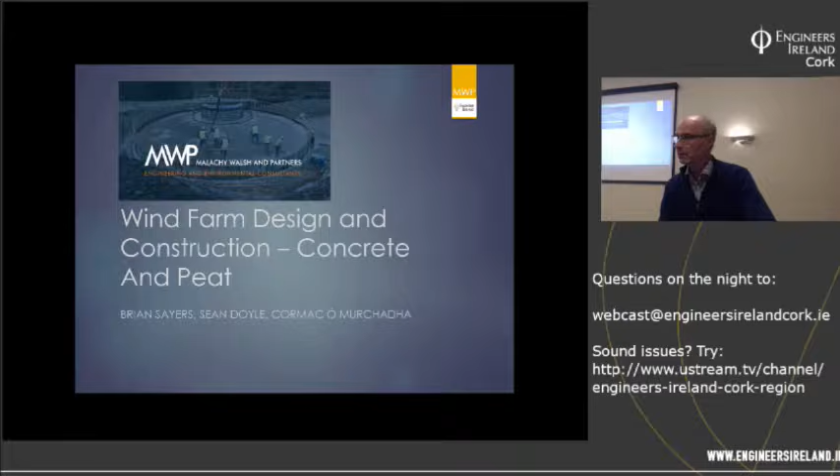Good evening, and thank you all for coming. My name is Brian Sayers, and I'm joined by Sean Doyle and Cormac Ó Murchadha. I'm from Malachy Walsh and Partners' Limerick office, and Cormac and Sean are from our Tralee office.

Malachy Walsh and Partners started in wind farm design about 13 years ago. Since then, we've been involved in approximately 500 renewable energy projects, covering everything from wind farm construction to pump storage, some solar farms, tidal barrages, and things like that. In the last 5 years, we've had an involvement in about 50% of all wind farms built in Ireland, and we've designed wind turbine foundations on 4 different continents.

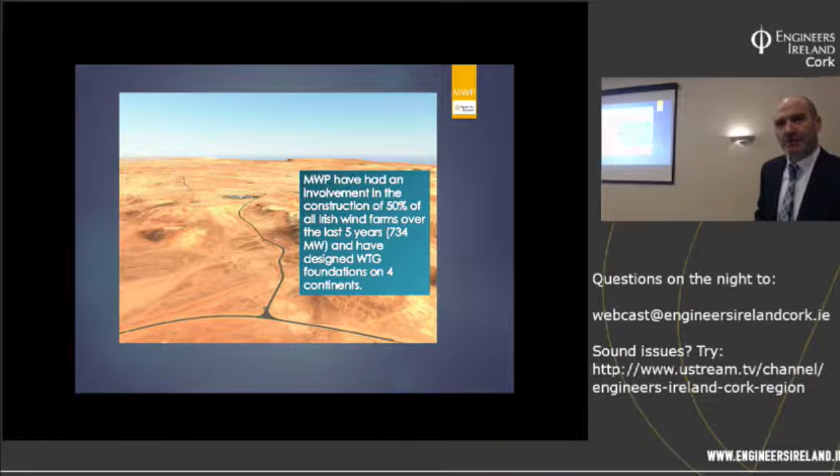We were hoping to make it 5. This project you see here was a submission we did with Enercon, the wind turbine manufacturer, for the first wind farm in Saudi Arabia, believe it or not. But it didn't go anywhere in the end.

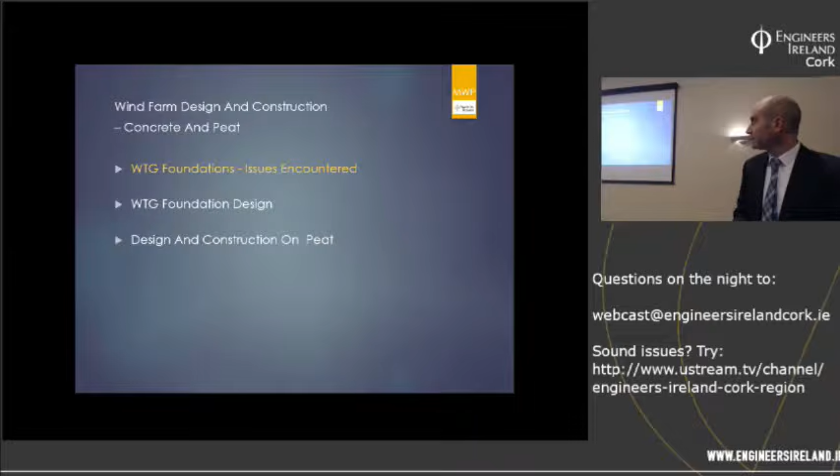So the title of our presentation tonight is Windfarm Design and Construction, Concrete and Peat. We chose to talk about concrete and peat because we found over the years that the majority of problems we've come across during wind farm design and construction have been related to one of these two. So I'm going to talk a little bit about wind turbine foundations and issues we've encountered during the design and construction of the foundations.

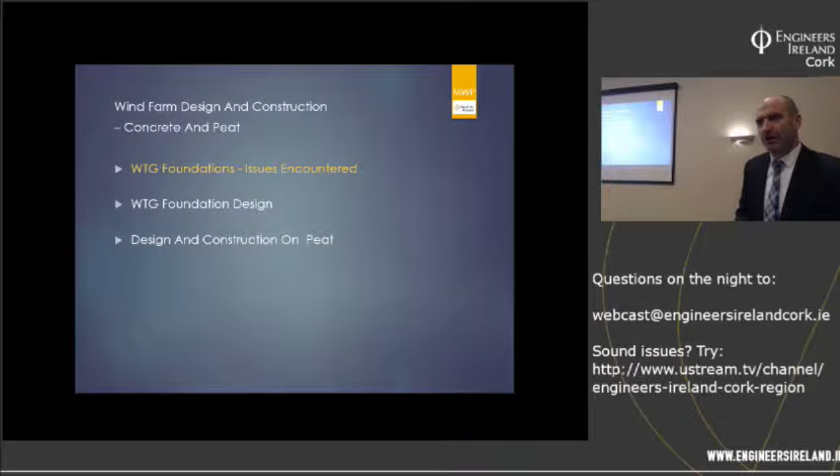I'm not going to bore you by going through the Eurocodes line by line - that's something Sean has planned for you. But try and stay awake, because Cormac has some very good stuff on peat at the end.

Just before we start, could we see how many people here have had some involvement in the actual design of a wind turbine foundation? Show of hands. So very few - 5, I believe, and Sean says 6.

So for people who haven't gone through that design process, it can be difficult to have a feel for the kind of forces and moments involved. The first time you get a wind turbine manufacturer's loading document and you open it up and you see the applied bending moment, it's a magnitude that's really quite amazing. I suppose it's a magnitude that nobody really comes across in other areas of engineering in their entire career. It would be very unlikely that you would come across similar kind of forces in the kind of bridges or buildings that we would be involved in here in Ireland.

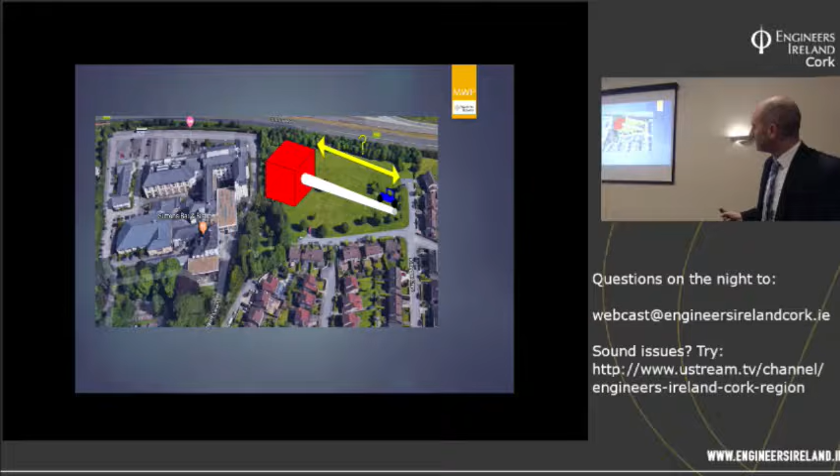So just to try and explain the magnitude of these moments involved in a more straightforward way, I've set up this kind of theoretical question. Imagine that we're here in the hotel in Rochestown, and in the field next door we build this gigantic block of concrete. We stick a wind turbine tower into the side of it, and we stick a little car on the end. What kind of distance do you think this car would need to be from that block of concrete before you'd start to get the same forces and moments that you get in a typical wind turbine? Anybody like to take a guess?

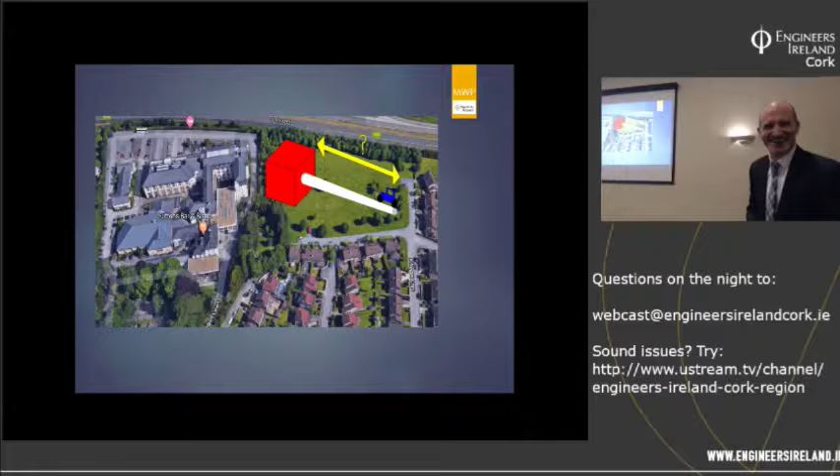Yeah, not a bad guess. In fact, it's probably about 20 kilometers. So your car would actually be out over the coast down by Kinsale somewhere. So it's a cantilever - a car on a cantilever that's 20 kilometers long. So the kind of foundation that you need to have to hold up one of these turbines, you'd obviously expect it to be quite massive, heavily reinforced, pushing the limits of engineering design.

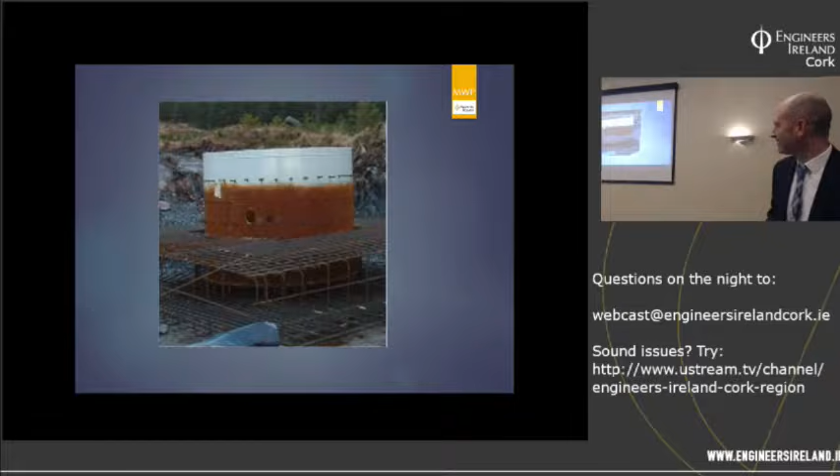So this is one of the first ones that was built in the country, and I presume it's still standing - I haven't heard anything different. This is one of the first ones that we were involved in, and the things you'll notice: first of all, it's square. You'll see we have made an attempt to put in kind of radial bars here, but by and large we have these orthogonal mats.

And you'll see that we have these holding down bolts known as an anchor cage. Foundations were also built with these cans, and a can really is the bottom part of a tower, and it gets placed into the foundation, and these radial bars are threaded through the little holes, and you can see we still didn't take a hint - we still put this orthogonal mat on top of them.

These cans have caused lots of problems over the years, and anybody here that has had an involvement in foundation design knows exactly what I'm going to talk about. But these cans needed a sealing detail to stop water from getting down the interface between the concrete and the can itself. And the sealing detail was a standard detail given out by all the different wind turbine manufacturers, and you didn't deviate from it. You can see that the workmanship is really quite good, and given that this man might have been doing this up on the top of the mountain at -4 degrees, the workmanship really is not bad.

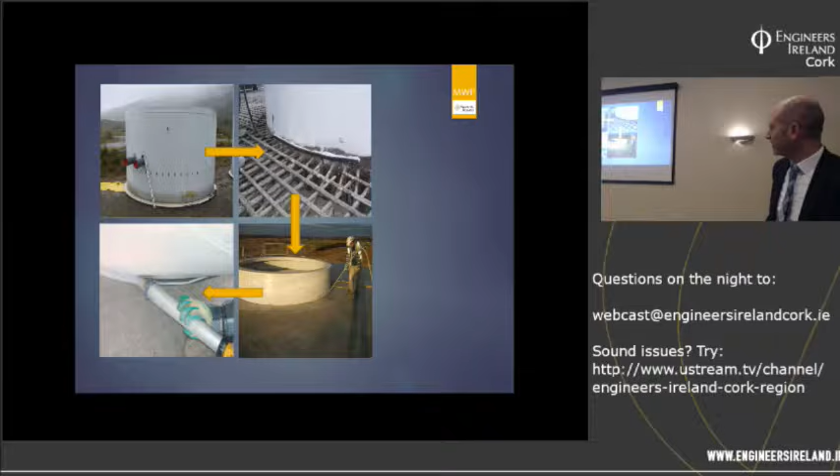But nevertheless, these cans did leave water in. The sealing detail invariably failed quite early on, and water got down onto this flange, and the rocking motion of the tower put this water under immense pressure, and it was confined. It couldn't escape back up quickly enough, and it actually started to cause hydrodemolition of the concrete on top of the flange and at times underneath it as well.

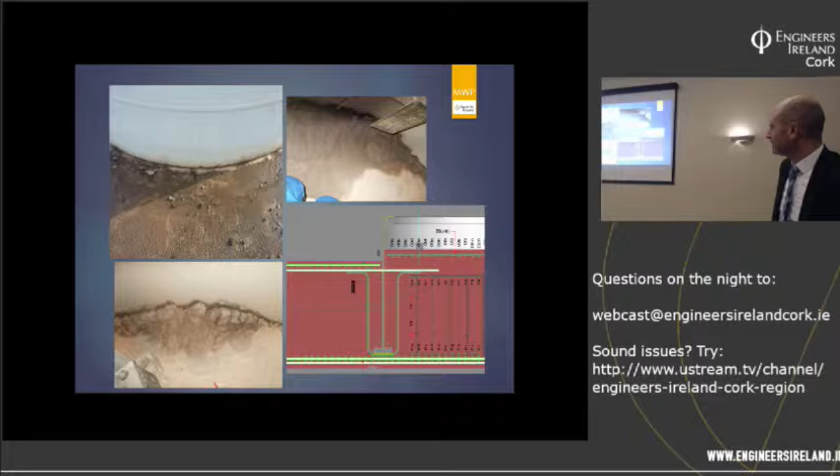One of the telltale signs that this was happening, outside of the fact that your tower was starting to lean more than it should, was this kind of paste that got brought up with the water, and you'd see it inside in the can here. A second telltale sign: you can see this little wedge of concrete that just cracks off, and as the can is moving up and down, it just pulls on this radial bar here, and it just cracks off this little wedge of concrete. You can make out this crack running along here, and if you did a hammer tap survey on that formation, you'd hear very easily that concrete had burst.

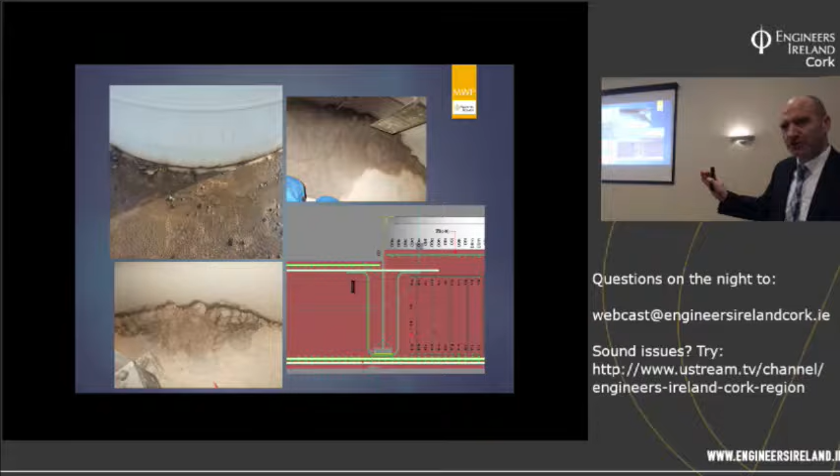So you can see the pumping action of the water coming out. I think you can see the same over here as well.

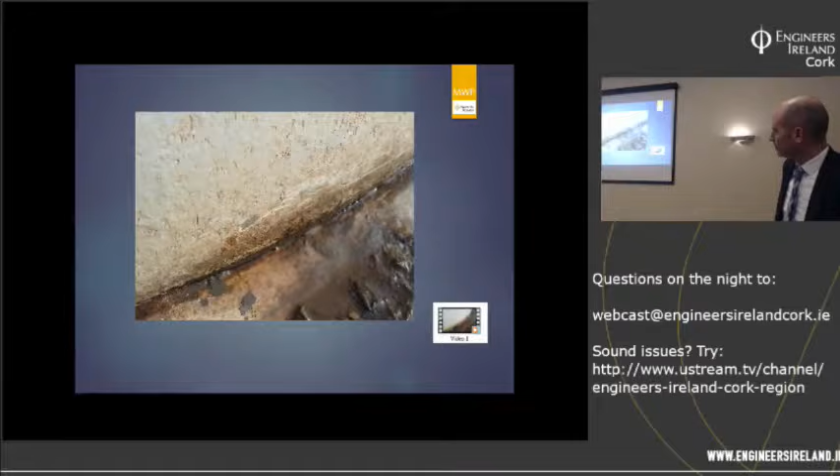Wind turbines are designed for 10 million cycles, so you can imagine the destructive effect of that happening 10 million times over 20 years or whatever it may be.

This is just another one showing a similar kind of thing. Without seeing this moving, you can see just from the dirt marks the difference in height here. This is an emergency shut off, when the turbine is just shut off very quickly, and you can see this just rocking in its foundation.

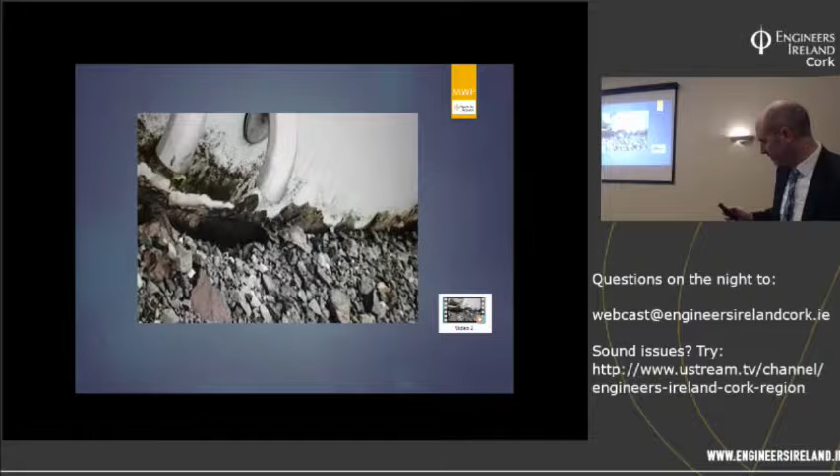Obviously our clients were not happy with this, and they wanted to know what was going on down inside that foundation. So we were involved in some investigative works. We drilled some holes down and stuck in a camera to see what exactly was going on.

It starts. So what you would see is you'd see voiding on top of that flange. You'd see a void underneath it, and those voids are like an annulus going the whole way around that foundation, and it just allows that can to move up and down. Obviously you have to go back and you have to grout it up and just pin it back into place.

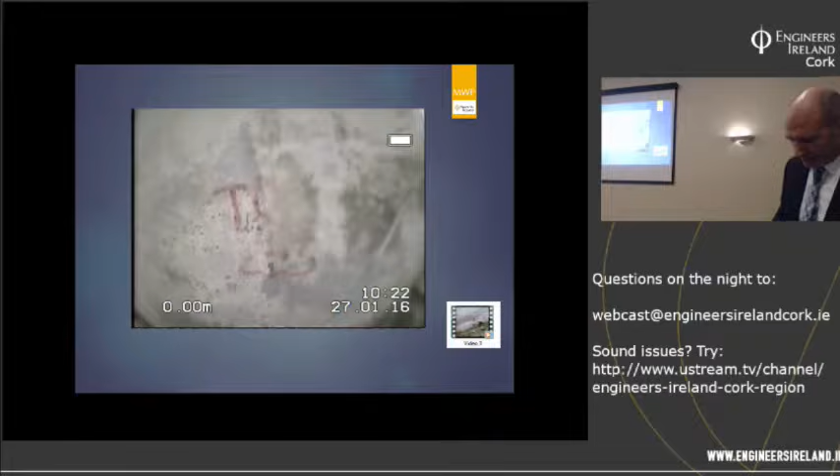Another problem that we came across on a number of foundations - we had these reflective cracks, and they were located over the reinforcement below, reflecting the positions of the reinforcement under. And we had these weep holes, and these weep holes were leaving water out for maybe 2 or 3 weeks after the foundations had been poured. So it was clear that it wasn't bleed water coming out of the mix.

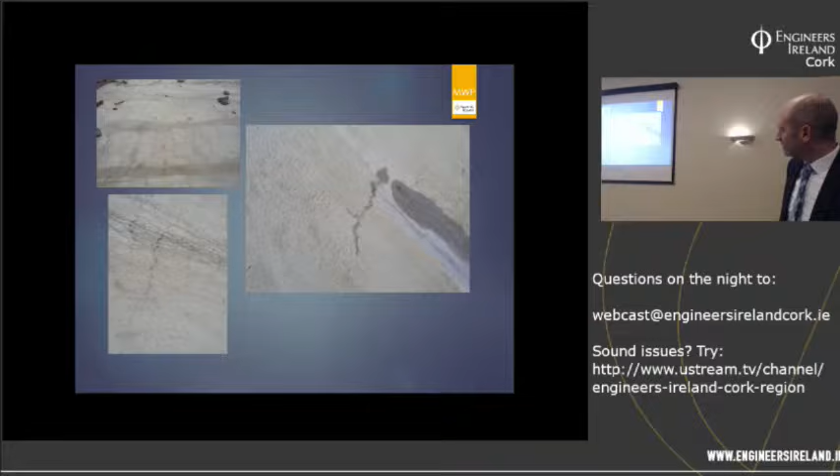When we looked at it, we saw really that the only source of water was this water that you can see here ponding in what's called a grout well. This is the grout well here, and it's just a rebate in the concrete. It's filled up with a high strength grout, and the tower sits down on top of it.

But we suspected that as the concrete was curing, maybe it was shrinking and just pulling away from these anchor bolts and just allowing water to get down to this level here. The reflective cracking is plastic settlement cracking, and it's synonymous with deep pours, and the concrete just settles into itself, and it kind of breaks its back over the top of the reinforcement.

So we suspected that if there was plastic settlement cracking, then there was a very good chance that underneath these radial bars, you were getting a very small little gap that was just acting as a conduit to allow water to make its way down to here. And once water got down here, you had this hydrostatic pressure just burst up to the surface, and it manifested itself as a weep hole.

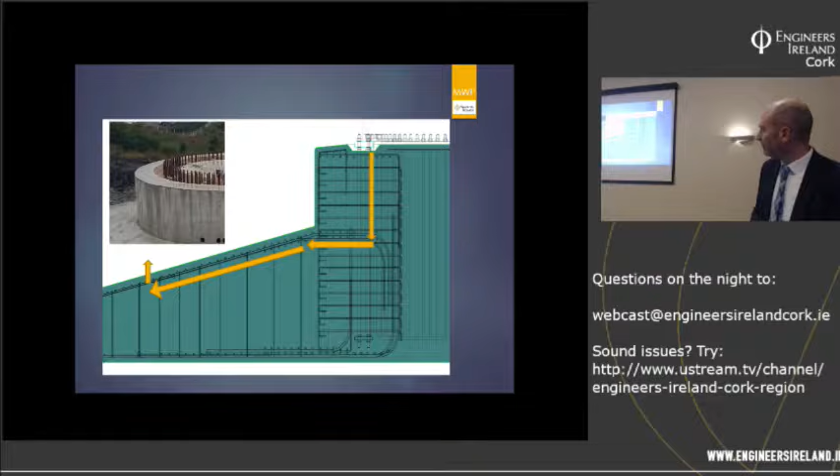Again, of course, our client wanted to know what was the meaning of all this. If you had a gap underneath the reinforcement, then you had a loss of bond, and if you have a loss of bond, you have a loss of tensile capacity and a loss of strength in the foundation. So we had to carry out some repairs.

Let's see, does this work?

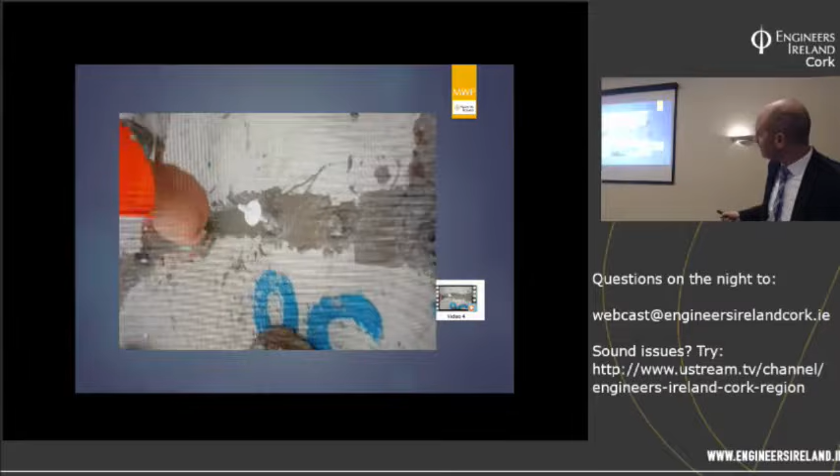So you can see here we decided to inject all the cracks. These nipples were glued on. The crack was covered over, and our resin was injected. And you can see here as the resin is injected here, it pushes water along the crack, and you can see water coming out of this nipple, and then it'll move along to the next one.

And really, the quantities of water coming out from a hairline crack, it was quite astonishing. You can see it coming out here now, and it'll make an appearance here in a second.

After this was completed, there was an onus on us to prove that it had actually worked. So we took some cores down through the base, and we saw that the cracking on both sides was now well bonded to each other. As we suspected, there was a very small void underneath the reinforcement, and this was now well filled with an epoxy that was giving back the bond you would expect from a new foundation.

So the last thing I'm going to talk about is just one aspect of geotechnics. To the best of my knowledge, there hasn't been a geotechnical failure under a wind turbine in Ireland so far. Speaking to experts who go around the world fixing problems with wind turbines, they say they haven't seen any geotechnical failures under wind turbines, which is certainly very good to hear.

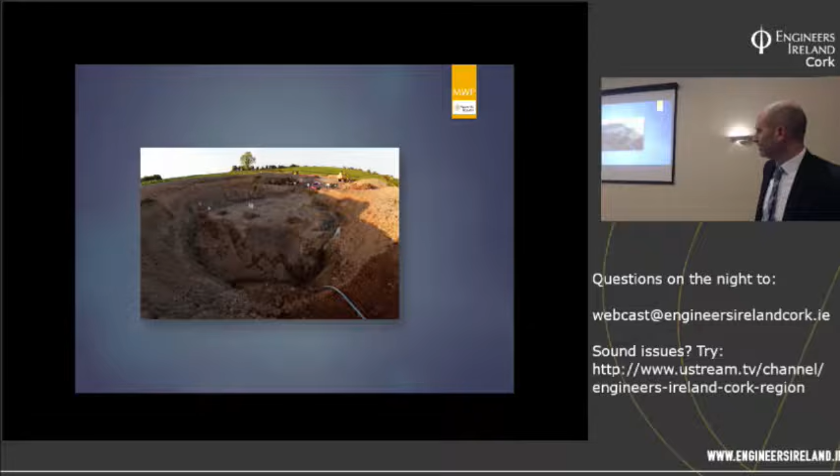This is just a typical excavation you would see on any wind farm in Ireland. You have a hard bearing stratum at this level, it might drop off to another level, and you have to fill this up, and check for differential settlement and rotations and static and dynamic stiffnesses and all that kind of stuff. But it's relatively well understood, and relatively straightforward to deal with.

If you're lucky enough to get very hard rock close to the surface, as we were with this project in the Highlands in Scotland, we found schist right up on the surface. They had big problems with concrete supply, so we did a very nice, small, neat foundation, and we just anchored it down to the rock - pinned it down.

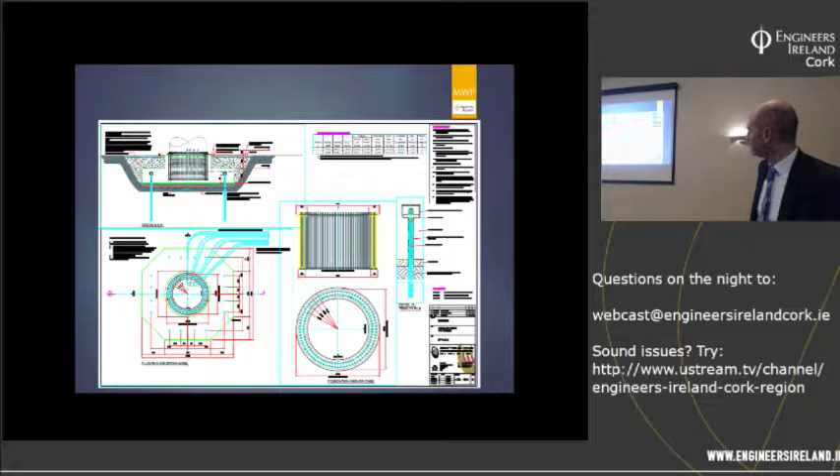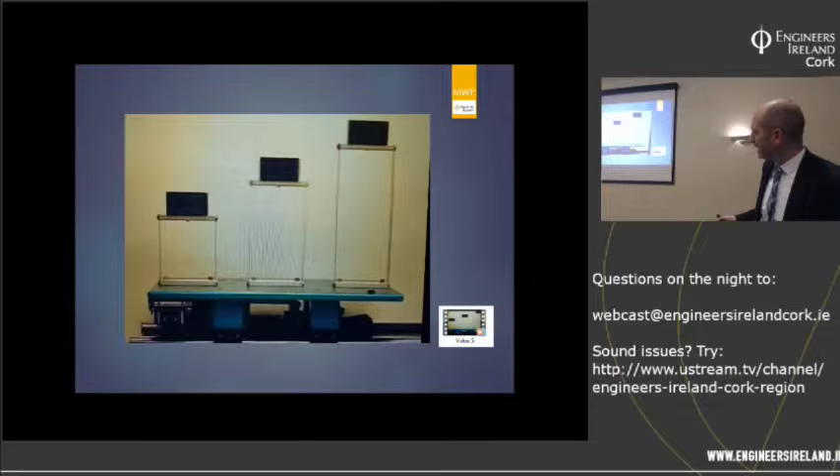The one geotechnical thing I want to talk about for a minute is the issue with resonance. For people who don't know what resonance is - it's when something vibrating vibrates at the same natural frequency as something else, and it transfers its energy into that other object. You can see here that when the vibration of this table speeds up and matches the natural frequency of this guy, this guy stops and this guy starts moving. The same thing can happen with wind turbines.

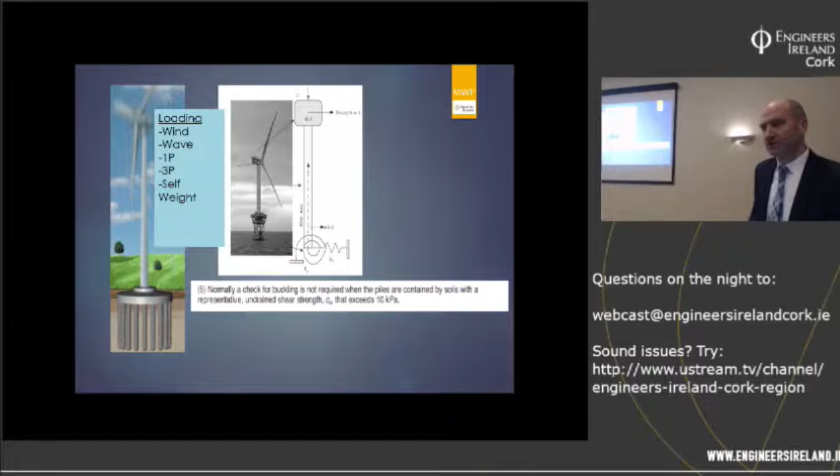It's not an issue for ground-bearing foundations, but it can be an issue for pile foundations, and it's certainly an issue offshore with monopile design. We've had a project abroad with, I think, 20-meter deep piles in ground that was very, very suspect. The Eurocodes say that any ground where the undrained shear strength is less than 10 kPa doesn't give any restraint to the piles themselves. So you end up with a situation where the foundation sits on top of 20 or 30 meter long piles, which are effectively acting like stilts, taking all the forces from a wind turbine.

The possible sources of vibration, onshore or offshore, are the wind - the period of wind is roughly 100 seconds, so the frequency is about 0.01 hertz. Waves in the North Atlantic have a period of about 10 seconds, so a frequency of about 0.1. Every wind turbine also has a vibration known as a 1P vibration, and if the turbine rotates at maybe 5 to 10 or 12 revolutions per minute, you get a frequency between 0.1 and 0.2.

If the turbine has 3 blades, you get a 3P vibration, caused by the shadowing effect of the blades passing the tower, and the 3P vibration is basically 1P multiplied by 3. So with this knowledge, you have to make sure the natural frequency of your wind turbine and its foundation doesn't fall within any of these zones, or you're going to get resonance.

It's unrealistic to think that the foundation will be down here. It just isn't flexible enough. To force it to be up in this zone means you'd probably have to make it very heavy, and it would be very uneconomical. So you're kind of stuck with forcing the natural frequency into this zone. And the DNV dictates that you add 10% to these zones as a factor of safety, which narrows down the zone where you have to place the natural frequency of the system.

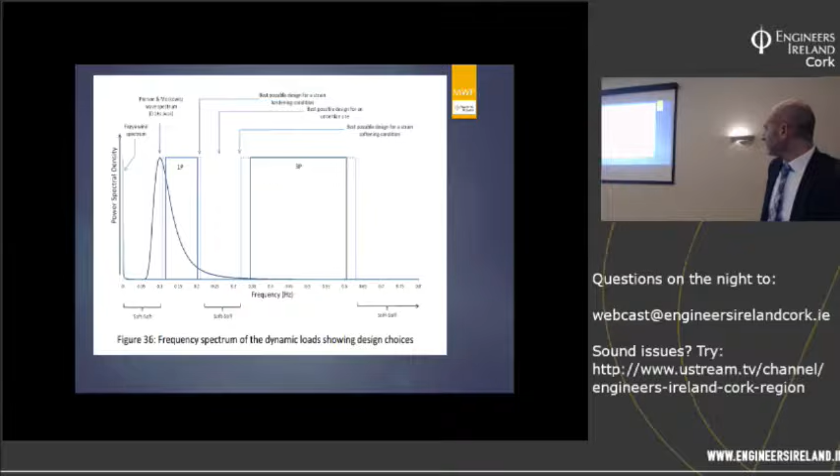So to conclude, in Ireland there are probably only maybe 5 or 6 consultancies actually carrying out wind turbine foundation design at the moment. It's quite a small pool, and our designs are pretty aligned at this point in time. You don't see much variation in them, and I'd say as an industry we're pretty comfortable with where we are with foundation designs.

We've been involved in foundation work with consultants in South Africa, the States, Germany, and other places. I think it's fair to say that in Ireland we don't lag behind when it comes to our expertise in designing foundations. We've found that on more than one or two occasions we've been able to show them a thing or two and help them make their own designs better.

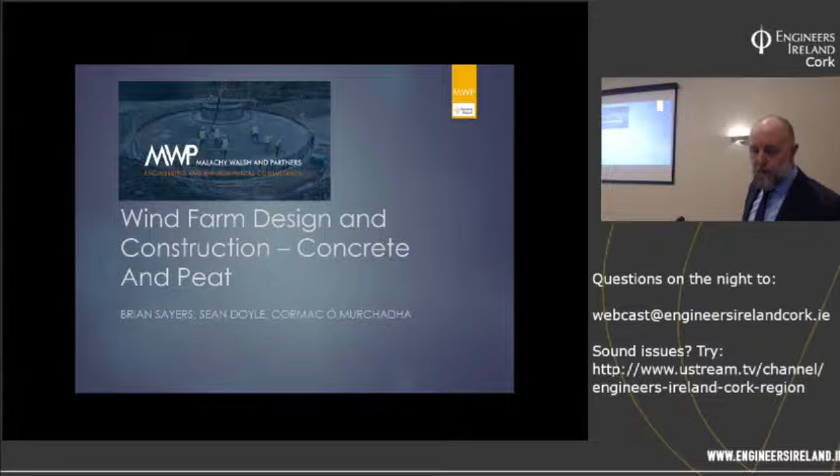My name is Sean Doyle. I work in the Tralee office of Malachy Walsh and Partners, and I've been involved in various aspects of wind farm design over the years, including work on turbine foundations. That's me in the middle.

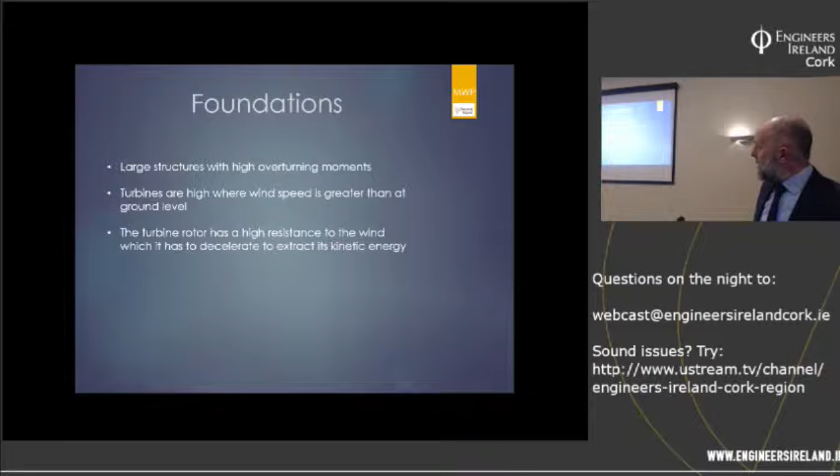As Brian said, wind turbines are subject to extremely large loads and very high overturning moments. That's because, first of all, the turbines are very high—they need to be high where the wind is. Wind speed increases as you go up from ground level, and the force the wind imposes on the turbines is very high. The function of the turbine rotors is to decelerate the column of wind. So I'm going to spend some time talking about the wind and those forces before I start talking about the foundations themselves.

15 or 20 years ago, wind turbines were maybe only half a megawatt, 0.65 then 0.85, but now most turbines are in the 2 to 3.3 range—that's typical in Ireland. These are typical sizes; they can vary quite a bit, but a 3 megawatt turbine would typically be 80 meters high with a 90 meter rotor diameter and tip height of 125 meters. The largest ones, like the Enercon E126, are very large in comparison—there's none in Ireland at the moment. But the hub height of an E126 is the same as the tip height of the 3 megawatt machines, so they're extremely large.

I'm just going to have a look at where all the force comes from. It all comes from the kinetic energy of the wind. There's a law called Betz's law, which defines the amount of kinetic energy you can extract from the wind. It was done by Albert Betz in 1919, and if you look up Wikipedia, you'll come across these diagrams showing a column of wind—as it goes through the turbines, it decelerates, its velocity decreases, and that deceleration causes the huge force on the rotors.

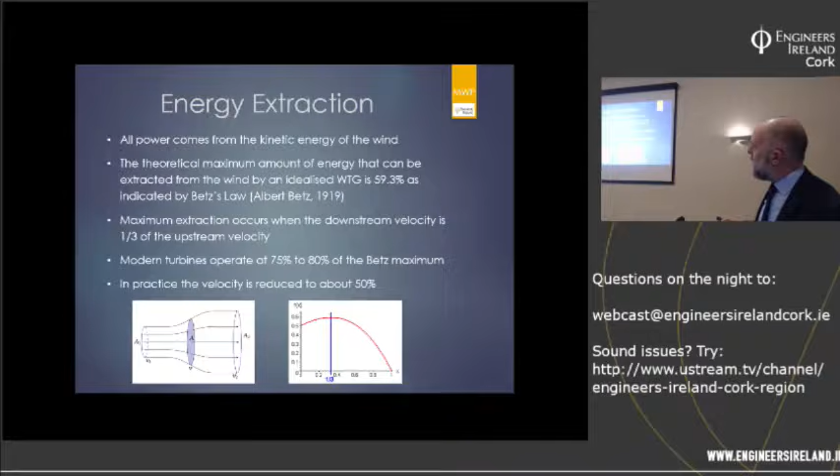It's interesting to look up Betz's law—it's based on conservation of energy and momentum. Basically, the more you decelerate the wind, the greater energy you get out of it. But there's a graph showing that if you don't slow it down at all, you get no energy out of it. The more you slow it down, you reach a maximum where, when the wind speed decreases to 1/3 of its upstream velocity, you get the maximum yield, which is 59.3% of the total energy. Modern wind turbines can achieve 75 or 80% of this maximum, which is about 45% of the total. So in practice, the velocity is reduced to about 50%—that's a huge amount of energy.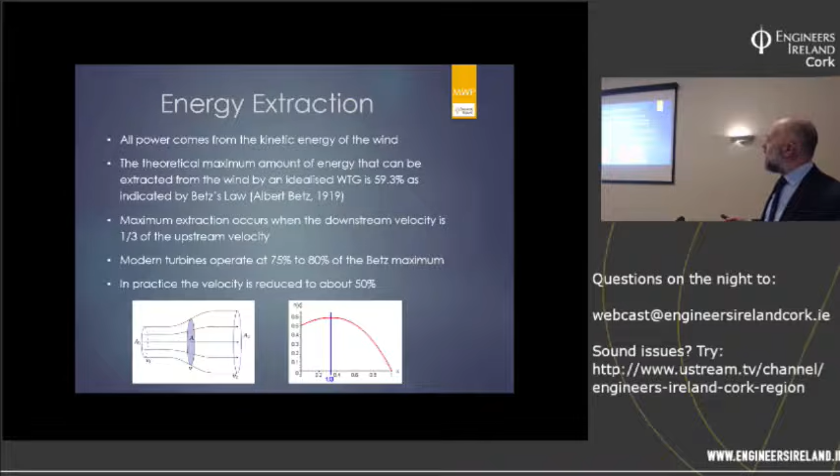The wind turbines start producing power at wind speeds of 3 meters per second, but they produce very little power at that stage.

Most turbines reach their maximum power at 17 meters per second, and as the wind speed increases to 25 meters a second, the output remains the same, because as it goes up beyond 17 meters per second, the blades are turned out of the wind, and the Betz coefficient is decreased and keeps the output constant. If it didn't do this, the turbines would get damaged. So above a 10-minute average of 25 meters a second, the turbine shuts down.

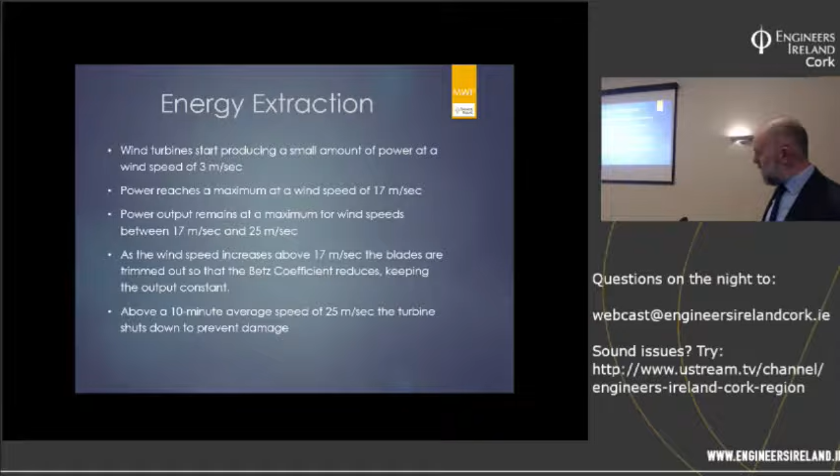Now this huge force I was talking about - the density of air is 1.2 kilograms per meter cubed. Most people would say that wind doesn't have any mass, but it is quite heavy in large volumes.

So the 90-meter diameter rotor would have an area of 6,360 square meters, which is about 1.5 acres. And at a wind speed of 17 meters per second, there's 130 tons of air passing through it a second. If that's slowed down to half its velocity, it's a huge amount of kinetic energy extracted from it. So essentially, that's where the huge overturning moment comes from for the wind turbine.

For designing the turbines, the structural design, the manufacturers give tables of loadings - operational loads and extreme loads. The extreme loads are when the machines are at standstill. The SLS loads are the top 1% of the operational loads, and they only occur 1,750 hours out of the total lifetime of the machine.

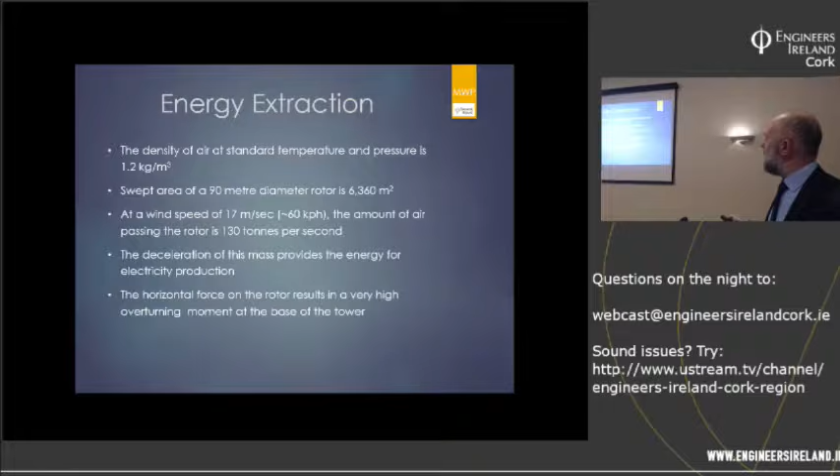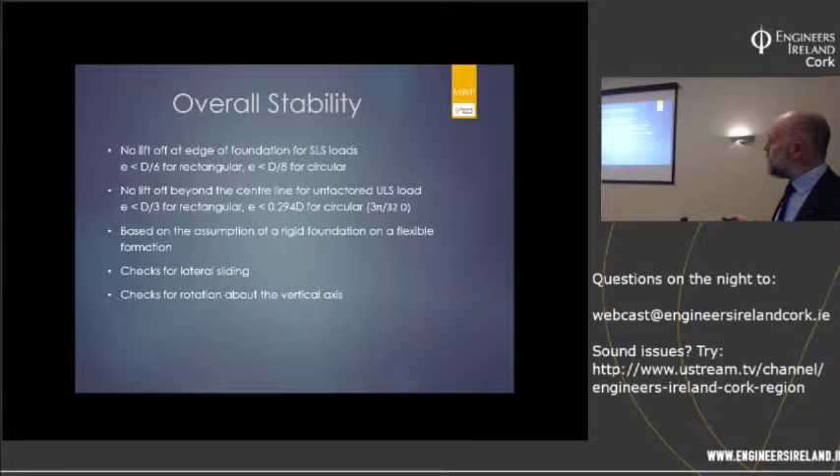For the circular foundation, the eccentricity of the load has to be within 3 pi over 32 times d, the foundation diameter. And this is the mathematics behind it - that's the derivation of that formula.

There are also checks done for lateral sliding and for rotation about the vertical axis, but these are never critical and have very high safety factors.

Now, foundations were originally square, back 10 or 15 years ago - the first one that Brian showed there was square. Then they progressed to octagonal, but now they're almost all circular, because the loadings are symmetrical. They can come from any direction, so it makes sense to make them circular.

Typical diameters are 17 to 22 meters, with concrete volumes of 350 to 600 cubic meters. Steel weight is probably 110 to 125 kilograms per cubic meter. So if you have 500 cubic meters of concrete, you'll have about 60 tons of rebar.

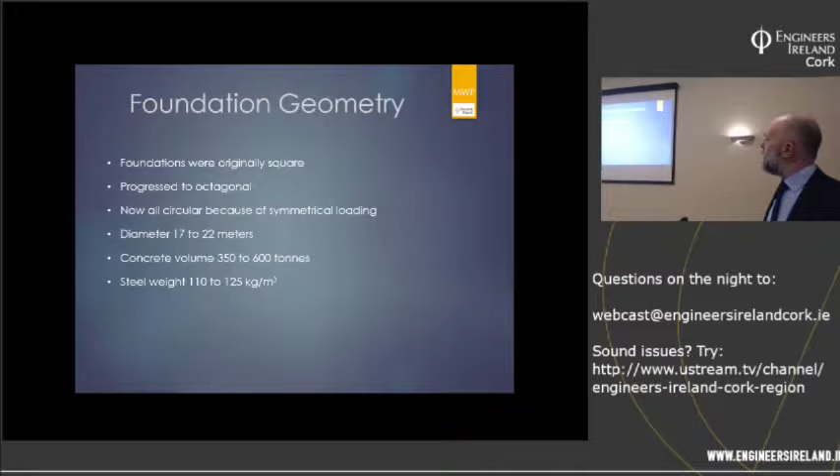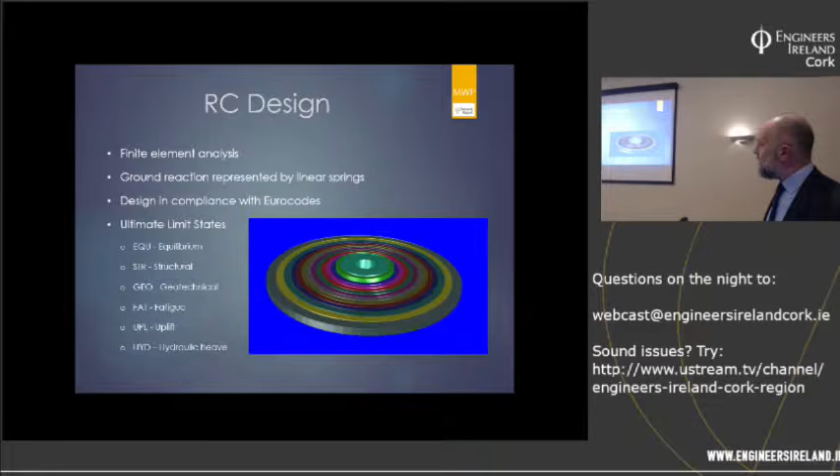I think the only one of those that really matters is fatigue, maybe. These are typical rebar drawings.

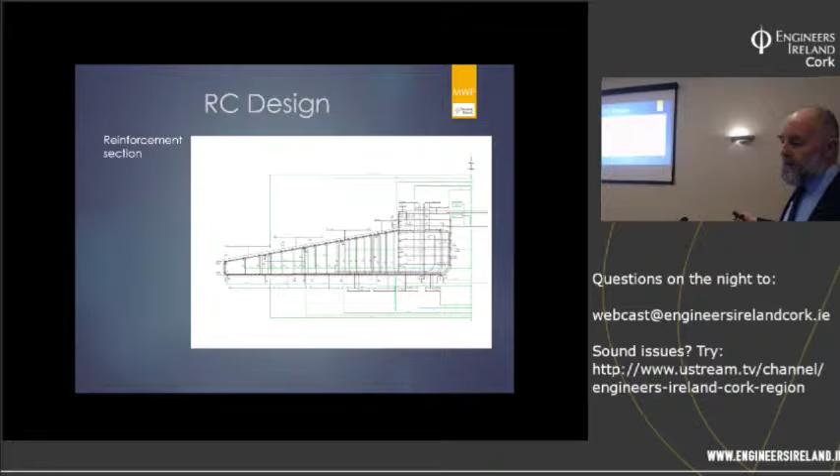The design has radial and circumferential bars, which are a very substantial amount of steel. This is the cross section. There's the radial bars with shear links, and in the center, where we have a huge amount of compression from the turbine, there are horizontal shear links to prevent bursting of the concrete.

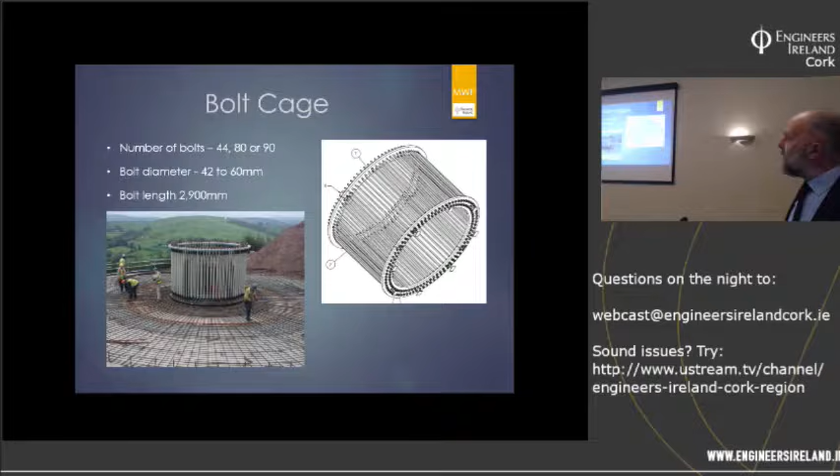The bolts are tensioned before the towers go on. They're tensioned at the bottom section of the tower. And they're not torqued - people refer to them as torquing bolts, but in fact they're stretched hydraulically, and the hydraulic pressure determines exactly what the loading is on the bolt. So they typically stretch by 5 or 6 millimeters.

So the tension would be 300 to 600 kilonewtons. I think the last one I designed recently was 600 kilonewtons per bolt on 80 bolts, 80 pairs of bolts. We've been involved in one recently with 60 millimeter bolts tensioned to 950 kilonewtons each.

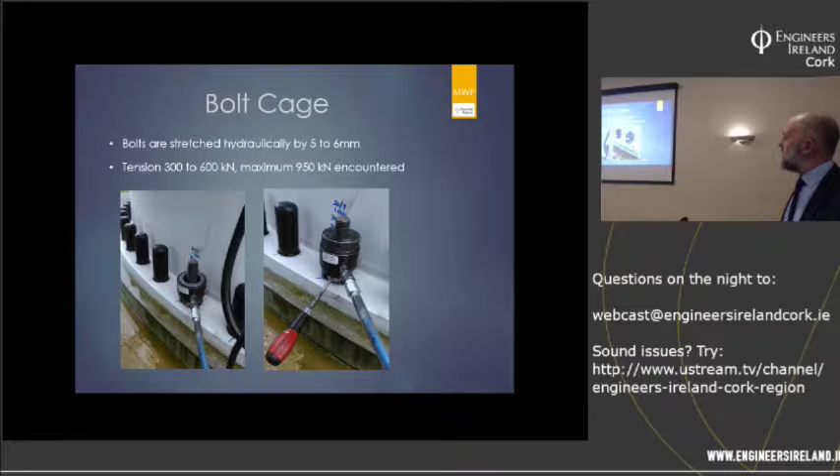Now the reason they're pre-tensioned is so that you don't get any stretching of the bolt under the extreme loads. But the bolts are not bonded to the concrete - they're in a plastic sleeve, so all the tension goes down onto the bottom flange.

When the bolt is tensioned by about 5 or 6 millimeters, the concrete compresses at the same time, but the concrete compression is probably only 0.3 of a millimeter. So when it gets the full load on it, the concrete relaxes, but it only extends by about 0.3 of a millimeter - that's the only amount by which the bolt will extend beyond its original stretching point. So in this particular case, the tension on the bolt only went from 600 up to 636, which is only a 6% increase in bolt tension. So you get very little variation down at the bottom, and you never get the problems that Brian was talking about on the cans, where you get pulverization due to heavy cyclic loads.

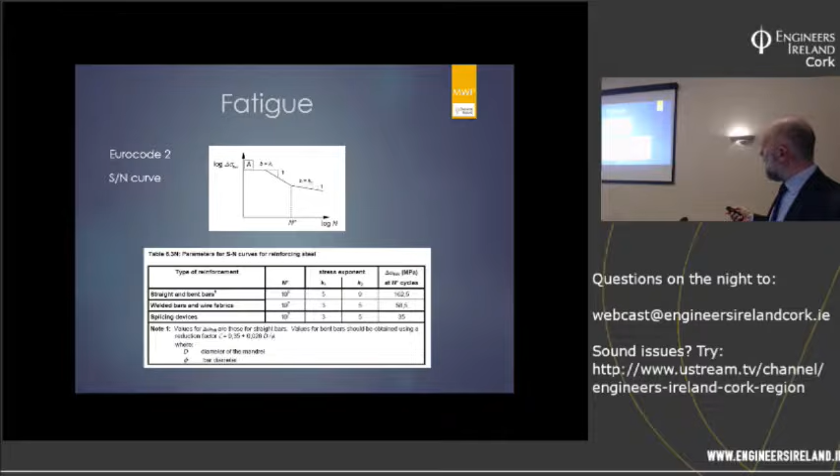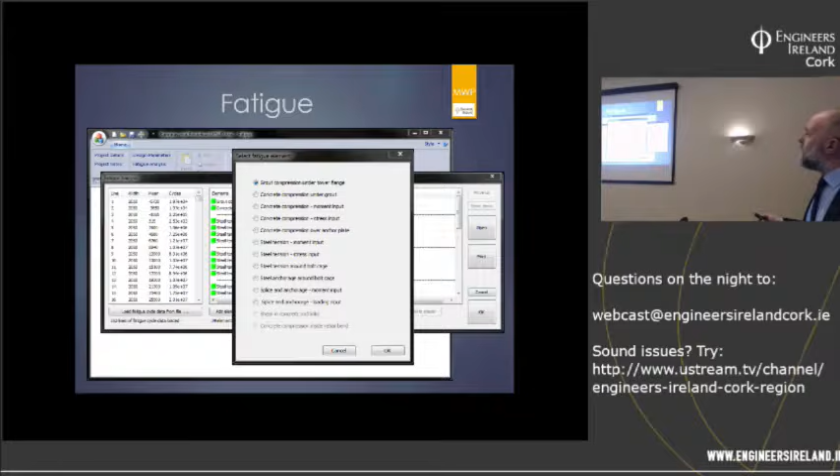So these are all the different elements of the foundation which are checked. These are the different things that you can check, different parts of the foundation. And for each one of those, there's a separate dialogue or a different method of analysis.

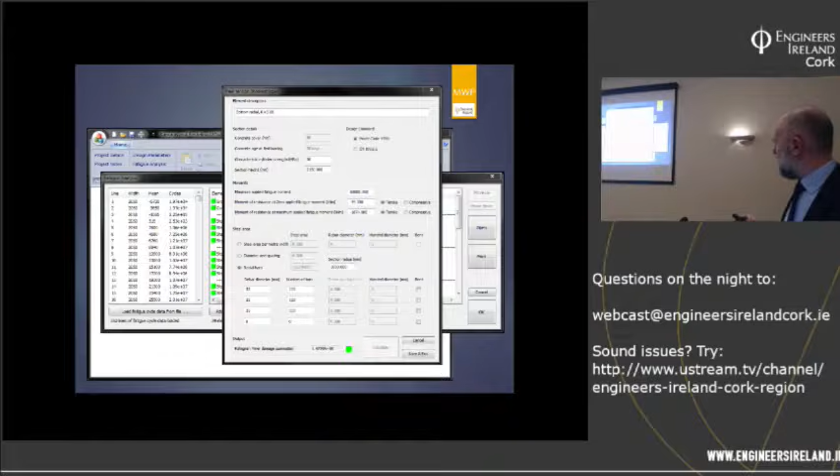Hi, my name is Cormac Murphy, Cormac Murphy, it's my official name. I'm with Malachy Walsh Partners 11 years ago, and I almost from day one ended up in Windfarms, and almost from day one ended up in Peat. My previous employer would have always said that I was never happy unless I was inside a hole of muck, with the tide coming in on top of it - that was pretty much some of my attitude, and then it's where I've ended up afterwards. It's funny, my life turns around.

I'm going to give a presentation on what it's like to build wind farms in peat. It's a very difficult media to work in.

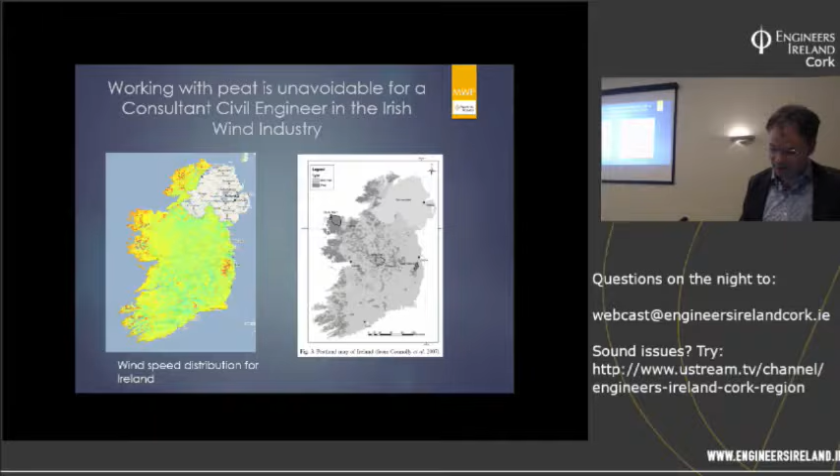So if you want to work, if you're a consultant in Ireland, if you want to work as a civil engineer in wind farms, you're going to be working in peat, so you kind of have to like it or get used to it.

Problems associated with peat - they're difficult work conditions. You've significant habitat impact, and as civil engineers we don't always consider that, but as engineers in wind farms, our wind farms are almost always in pristine or semi-pristine areas, high value habitats.

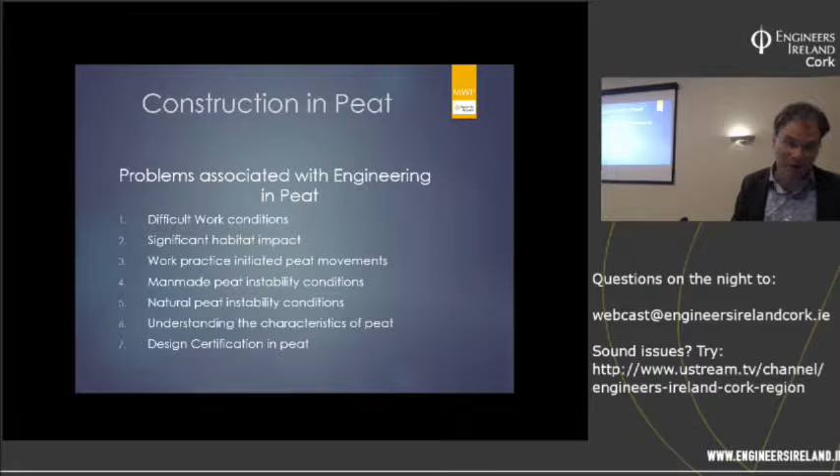Now, the instability conditions, the two main types: you have work practice initiated. Theoretically, these are the easiest to prevent using experienced personnel and supervisors. In practice, that's all very well and good to say, but it happens.

Selecting appropriate construction methodology and vigilance matters. We had a mini boom in the wind industry a couple of years ago, and we have it now in consultancies - trying to get experienced people, trying to get the right people on the ground was very difficult, and it becomes a problem.

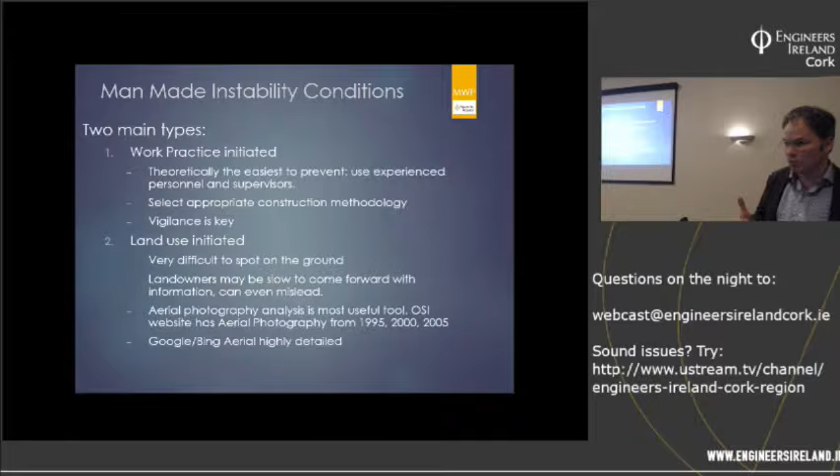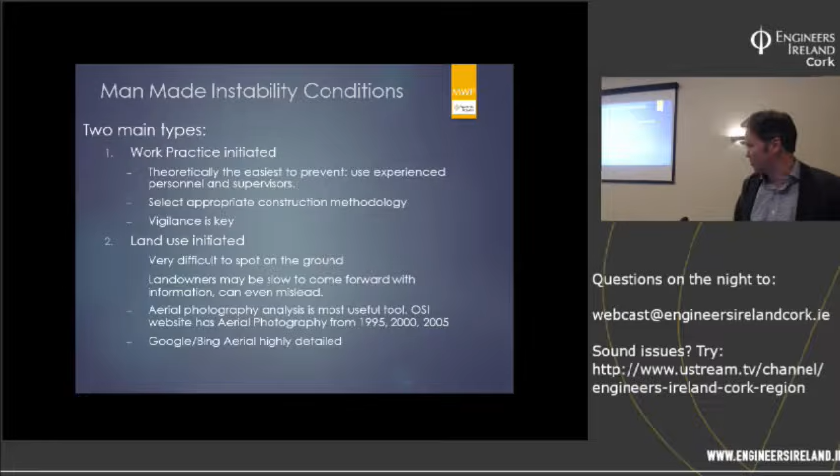I'm going to go through one or two examples here. Over the years in Malachy, we've become very adept at spotting the indicators, and we're getting better at it. Aerial photography - I spend half my days poring over aerial photos of different years, different areas. And of late, Google and Bing imagery have become really, really good.

So if you're working in line with the cuts, you're in big trouble. Going across the cuts, you won't even know they're there. But it is as simple as that - it carries no load going longitudinally, and it'll carry a normal load going perpendicular to it. Very hard to deal with.

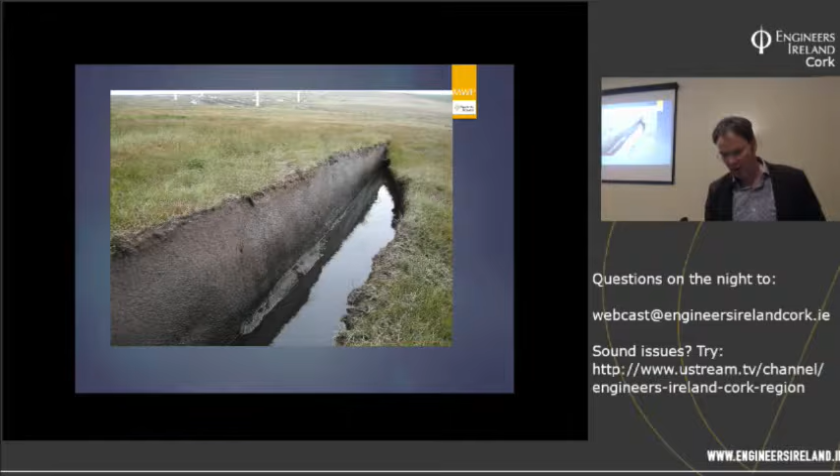This is the effect of it. Normally that bog behaves like a carpet on top of what's underneath it - soup is probably the best way of describing it. But the carpet on top is able to spread the load and carry it really well. When it's sausage cut, that's what you get - you literally have a vertical cut going down for the depth of that chainsaw, and the characteristics of it completely change. This is a picture of what happens when it does go.

I like to describe this as coming home with a sliced pan and a pound of sugar - you were all old enough to remember this. You put a pound of sugar up on top of a sliced pan and it'll stay on top. Take the wrapper off the sliced pan and try the same thing, and it's not going to work. So the load carrying capability of the peat is completely taken away when it's sausage cut. But if you're going across this way, it still has a certain amount of capability - going along the lines of it, it has zero strength.

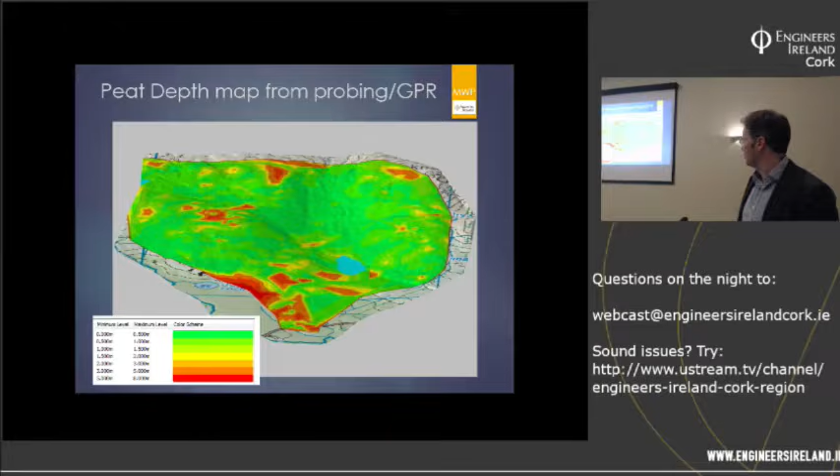This is a site in Galway. It's not particularly bad because the peat depths are pretty shallow for most of it, but you have a combination of slopes. We combine those using the prescribed methodologies, using infinite slope stability analysis. We run it through computer programs to create hazard risk zones, and you try and design your wind farm around the bad areas as best you can.

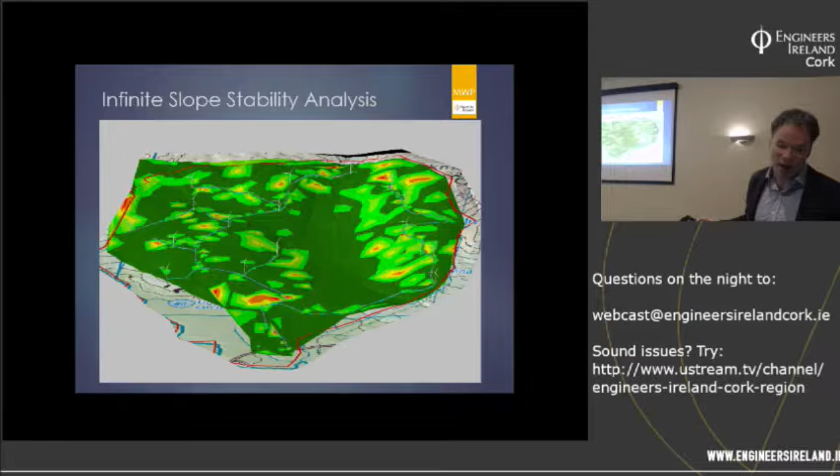We do another constructability assessment, which weighs things differently from infinite slope stability analysis, taking more into account our experience. We apply higher factors to peat depth and slope. Again, when you're designing, you try and stay away from areas that are going to give you trouble.

One of the better things we're getting lately is GPR, ground penetrating radar, which has come in a big way into wind farm work. Instead of going out peat probing, we're able to get very good subsurface profiles now, which make our analysis models much more reliable than they were, giving you a better picture of what you're dealing with.

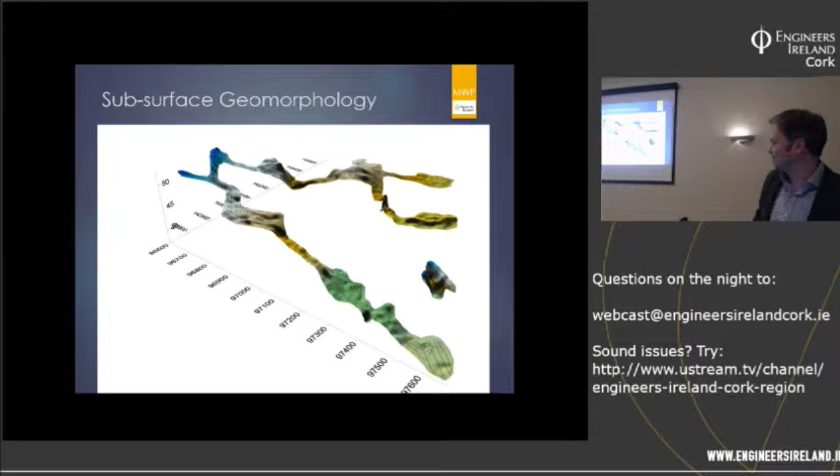So I'm just going to run through a particular wind farm that we just completed lately. It encapsulates all the problems that we get working on peat. This is Tullahennel Wind Farm in North Kerry.

One of the things we're coming up with is we have a lot of legacy planning applications. If you were to go out tomorrow now, you wouldn't try and put turbines in Tullahennel. You can see the peat depths there - we have greater than 6 meters. A significant 30% of that wind farm is in peat depths greater than 6 meters.

Before we went to Tullahennel, 4 meters was the deepest we'd ever come across, and we were faced with this place where over 50% of it was greater than 4 meters. Most of that wind farm is in really deep peat. On top of that, we had sausage cutting, and we had an existing slide that we had to build over - our historical slide.

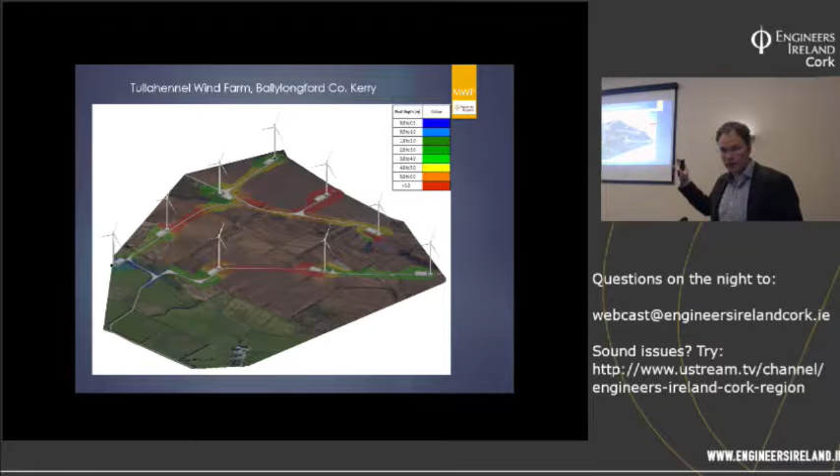So this is when we arrive at peat, this is what we're faced into. We have to try and come up with our solutions, and then we have to certify it. Now, it's tongue in cheek, but I know it works in practice - now if I can only get it to work in theory, that's a big problem in peat.

It's not like soil geology, soil geotechnics. There's a world of knowledge out there and background calculations available to people to certify, to analyse and certify ground conditions. It's just not there for peat, and it's very difficult to do for peat because of the unpredictability, because of the variability - you have variable strengths vertically, horizontally, and it's thixotropic as well.

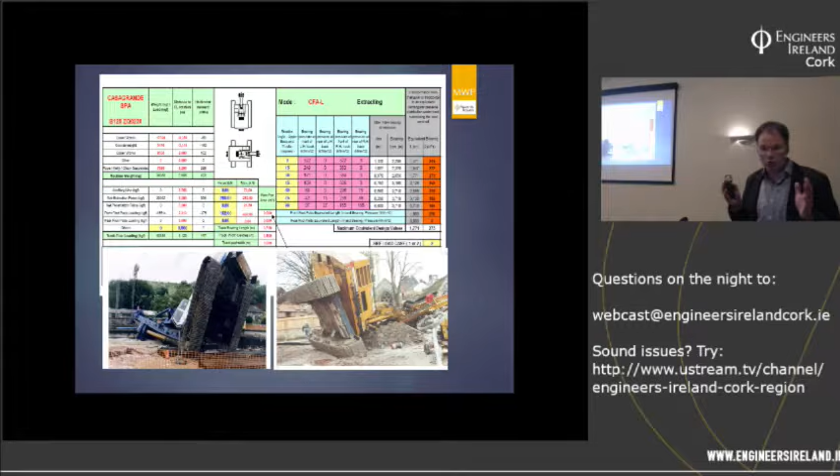The loadings for the cranes and the hard stands is huge, and it's fine for the overturning of a piling rig, and for we piling as well. But the amount of risk is you've only a driver and an attendant. But when you've a crane putting up a turbine, there's a heap of men around this. You just can't get it wrong. So we still have to try and certify it, but we end up with much more conservative designs.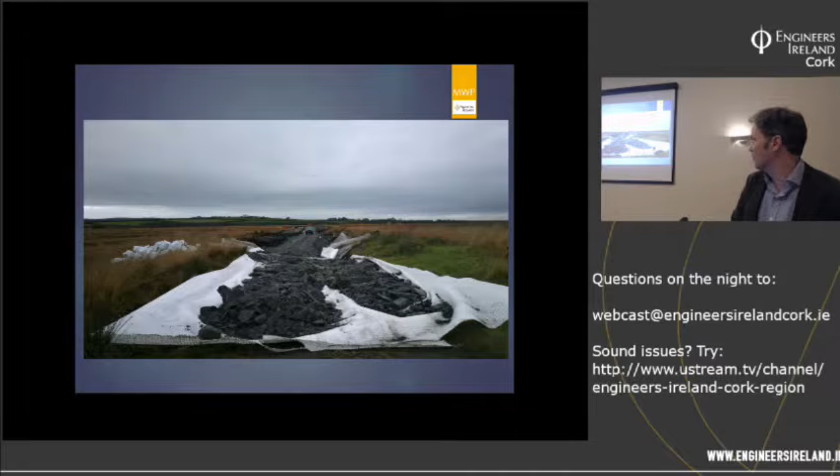Now, our solution — we had done this once before on a real small section in a windfarm, and we sat down with our contractor and said, lads, there's no way we can guarantee these roads are going to stay up on top of 6, 7, 8 meters of peat. So we had this in the back of our heads: a lightweight floating road that replaced aggregate. We used logs instead of aggregate. It's a really old technique, goes back to prehistoric times.

We introduced geogrid into it. The principle was that as this road would sink, the buoyancy of the timber — Douglas fir is around 0.7 — means that when it sinks, it goes from being a weight to a positive buoyancy. So it limits your long-term settlement of the roads. It also, the fact that timber has tensile capacity, lets you spread loads over much wider areas than we were getting with stone. With stone, you're depending just on the 45-degree load spread, and the geogrid had to spread it a little bit further. Whereas with logs, we were getting 5 meters this way, 5 meters that way, and then we were able to spread it longitudinally as well. But you had the safe knowledge that in the long term, settlement would be controlled through the buoyancy.

So we put stone on top of it because you have to get traction, you have to have a road for the turbine deliveries to come in with normal standard wheel trucks. So we had to put aggregate on top of it, but we limited our aggregate. We did a balance check to ensure that the buoyancy would match the downward load, taking into account that the peat had some amount of strength.

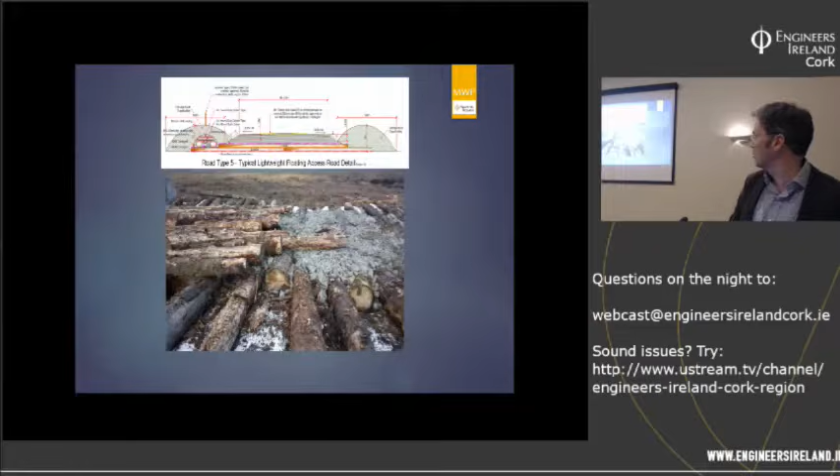I'm not sure if any of you are working in geotechnics, civil, or heavy civils. The robustness of combi grid compared to geogrid - the salesmen all have their different spiels, but what we're finding is that combi grids are so much more damage resistant than geogrid. If I could go back to that other slide, you'd see at the bottom corner we bust a lot of grids - we found the grids were breaking. We didn't bust a single one once we switched to combi grid. We never had any of those problems again. The combi grid just seems to be able to resist damage.

This will give you an indication of that section of road being built over the place going into where the site was before. That's only a 12-ton digger, and he's sinking on top of the logs down to water level. So your water level is at ground level.

We're bringing in stuff with low ground pressure machines. Remember, we have to bring 100 tons and more across that bog that you can hardly walk in. We persevered, kept going, and got our roads built.

We looked at the one cable - this here was actually a cable run, because you have to carry your cables from turbine to turbine. They can't slip, they can't go under, so we had to float our cables along as well.

Now we're in there - this has never been done before, never tried before, and we had to prove to the client and to the guys who live near the wind turbines that it was going to work. The only way we could come up with was to do proof roll testing.

So we ran trains of A40s and A35s. That's an A35 running there at 55 tons loaded, and that's an A40 at 60 tons loaded. So there's the two rows, and there'll be another one behind.

We did proof runs with the turbine manufacturer, with the guy who was going to deliver the turbine, and said: right, walk along with us - this is what they're doing, this is how they're spreading the load.

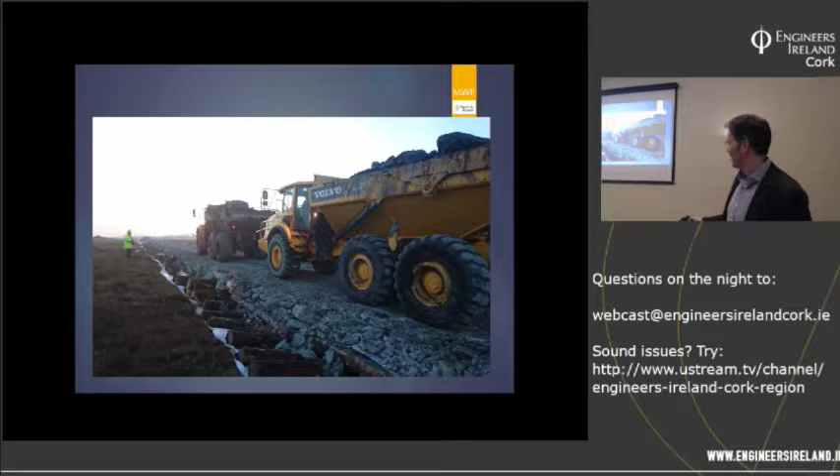So you're looking at 130 tons there over the length of two dump trucks. And the slide I showed you earlier, the road failed under its own weight - yet here we're getting such a load spread with the longitudinal and transverse logs and the geogrid. There's probably other slides I didn't bring in, but the amount of tonnage of stone they shifted was just astronomical. I didn't bring it all - I can't show all my dirty underwear.

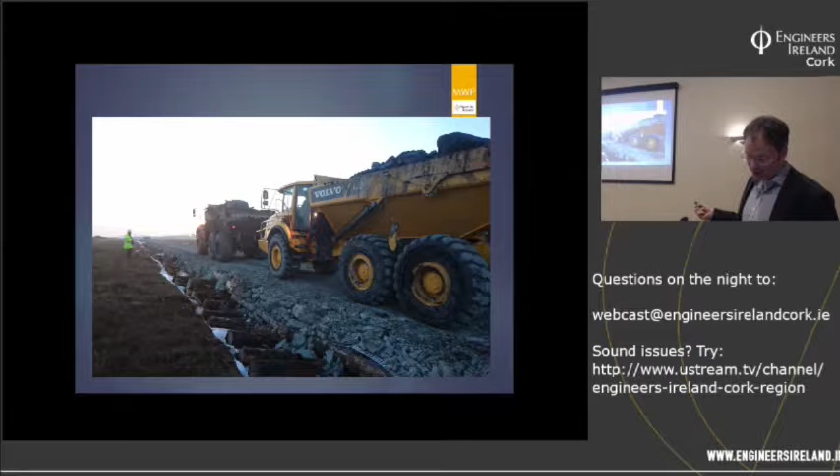So that was the first section, the floater roads.

Now I should actually have brought over and back - here we were faced with landowners not telling you the truth. One of the other turbines, T6.

We came off of a cutaway bog here into here, started digging, and the whole lot was sausage cut. Now the landowner - the developer, the person who put together the project - had sworn blind that it hadn't been sausage cut. First bucket in the ground, and the ground just started coming. It was all sausage cut. And as Winston Churchill said, if you're going through hell, you just got to keep going, and that's what the contractor did.

Now we also had to build a turbine base inside that peat, and the only technique the lads had at the time was to excavate and replace - you build a stone berm around to create a cofferdam, dig out, and go down.

That's a 20-ton digger - not a mini digger - down at the bottom of a hole for a 22-meter diameter base. A lot of material - that was 7 meters of upfill, the deepest one we did. After that, we switched to piling.

I'm at ground level, like that. This isn't looking up, this is looking down into that hole. The ground level is above you.

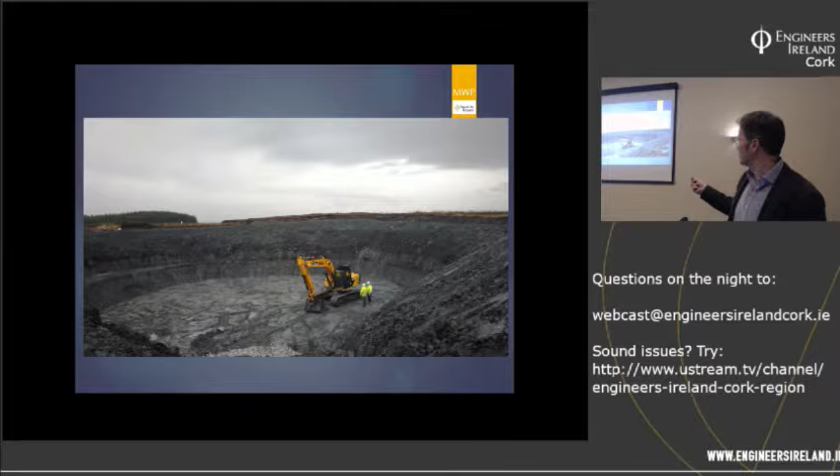So you've, I think, 4 or 5 meters of peat being held back by a rockfill berm while you dig out and upfill your turbine base. I threw in some calcs so you wouldn't think it was just comic books that I read all the time.

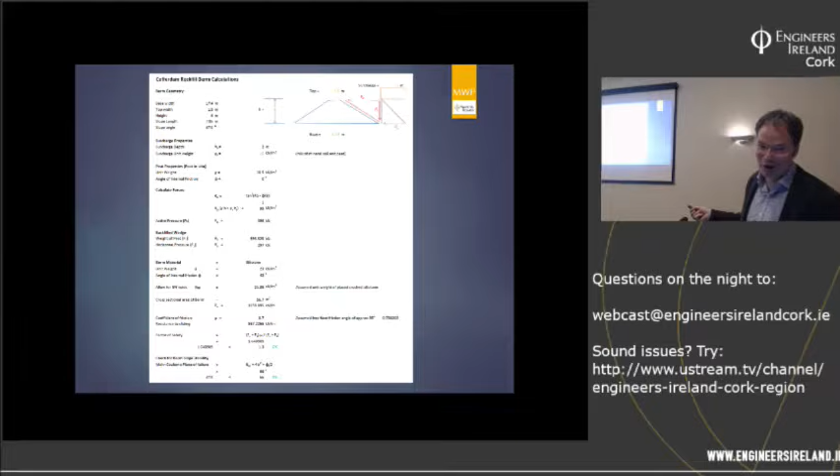And we knew we still hadn't gone to T5 at that stage. So we needed to have a change of plan. And the next one had to be cofferdammed. Now this was 8 meters of peat.

Again, I go back to your problem with sheet piling: you have to put in the sheet piles, you have to extract the sheet piles, so you need a hard stand to put the piles in from, up on top of 8 meters of peat.

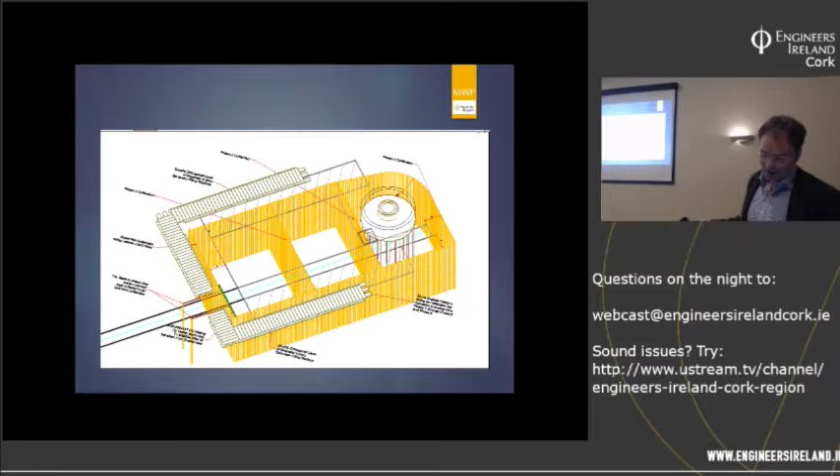So again, we got our thinking hats out. Most of the loading, when you start doing this type of work, design starts for piling rigs, the largest loading is in extraction of the piling hammer. So we separated those two.

We totally integrated temporary and permanent work designs, and we said, right, we're only going to install the piles off of our temporary floated hard stand, and we're going to extract them off the permanent rockfill. And that allowed us to do away with, let's say, the contractor hadn't taken for any of this piling, so we're faced with, we can't go back to what we had done the other one.

He had to sheet pile, but the temporary works for propping it and for bracing and waling it, I think he got a quote of $250,000 for the bracing for a job he hadn't priced. He hadn't priced cofferdamming it, he hadn't priced bracing, so we had to figure out a way to get rid of the bracing.

Not easy with an 8 meter deep peat. So the first thing we did was separate the requirements for pile installation and pile extraction. So we said, right, this only has to take the eccentricity of the piling hammer and the pile. He only has to hold them, he doesn't have to pull them back up again.

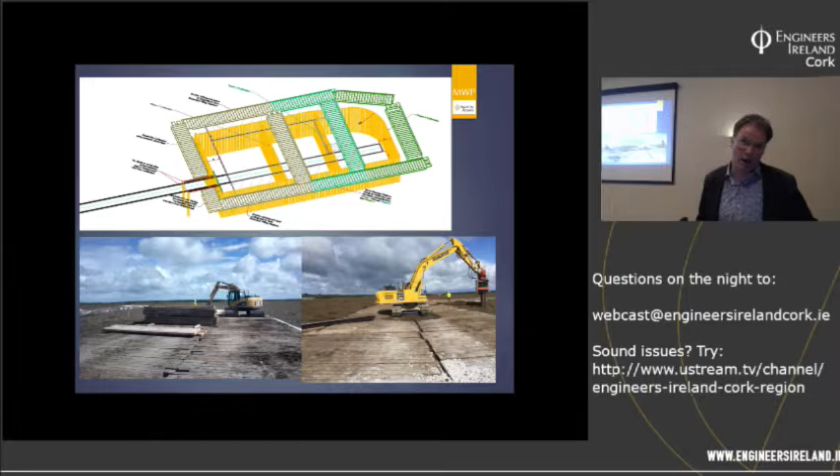So we had a definite weight, and we were able to spread that weight over our toggle. These block mats are spread in 2 directions. We were able to put a track on each section to get our weights, and then prove it. Again, it was empirically proven rather than mathematically proven.

Now those piles then had to be extracted, and we had to figure out how we're going to hold the stone after we pulled the piles - that was another issue. So we did an upside down geogrid situation.

Now, we had to give certainty of bearing capacity of 250 kPa. This is where our main crane had to get set up. So there's the load path: we put 80 degrees down through the geogrid, as specified by the manufacturers, and then we took a 45 degree angle to the toe of the pile.

And that was it. So we guaranteed - we set back the bearing strata from the toe of the pile - and again, proof of the pudding is in the eating. We know the maths for this either way. The proof of the pudding is in the eating.

That is a 50-ton digger. I can't zoom in now, but this section is reinforced - we only did it on the perimeter. This section is reinforced, this is not. When you pull the piles, the bit that's not reinforced went away, but the reinforcement sits up the top of that line of geogrid over 8 meters of fill, digging out the peat in front of him.

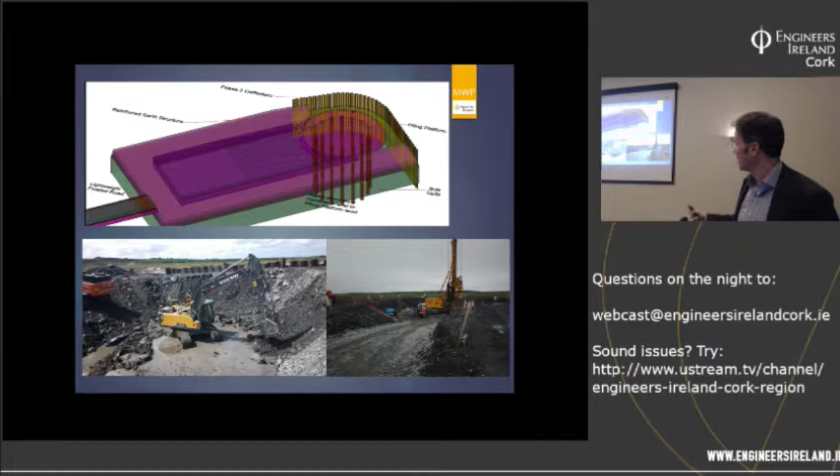While the permanent piling was going on, while the rotary core piling for the turbine base was going on, we were able to extract the piles and off-hire them. So the piling got completed.

You can see the radius impact. The impact was limited directly to the footprint of our works, whereas in the previous one where we had gone straight in, they went 60, 70 meters outside of it. There was virtually - like the situation here was, when the pile was laid out, and when the piling hammer would pick up the pile, you used to drag along the bog. That was the extent of our damage - some drag marks from the piles.

So there's a turbine being put up. Like I said, that's a 1,200 ton LTM 11200, picking up the rotor, putting on the nacelle which is 70 or 80 ton on its own. But as you can see, the whole thing restored very well.

There's the head of that slide. They're all the marks, the scars from the previous slide.

I say if you absolutely need something done, tell an engineer it can't be done, and they'll figure out how. And that's pretty much what went on there. We said, how did we never get it? It shouldn't have been able to be done, but we got there in the end.

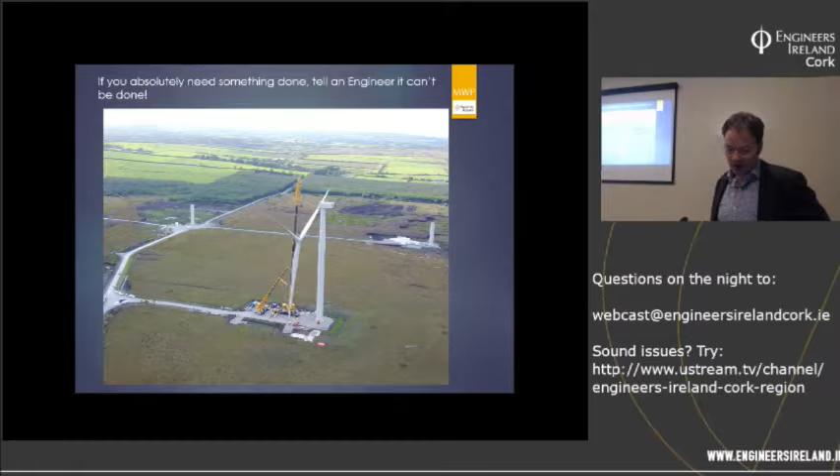The lads on site, I couldn't say enough. He's going to become a legend in his own lifetime - the foreman, Arthur Moynihan, like some of the stuff that they had to try and do off the cuff in really difficult conditions. But it took a team.

Anybody who knows myself and Taglieri's relationship will know it's hard for me to give him praise that's due to him. But the PSDP and the owner's engineer had to join forces with us to get that thing done, to get stuff across. They had to trust that the contractor was going to do what the engineer designed to the extent that he said he'd do it. Without that full circle of cooperation and trust, we would not have gotten that job across the line.

Like I said, none of the floated roads, none of the log roads had been proven before. That upside down hard stand hadn't been done before. I was aware of it - I don't know, maybe I'd done some stuff like that before in marine engineering, but not to the same extent, and not as critical as what we did there.

But it was a team effort across the whole thing, and I couldn't speak highly enough of the two lads that ran the team for Moriarty's on the ground.